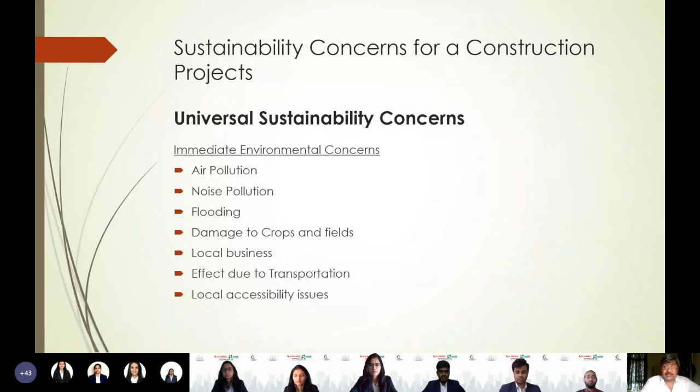Then we come to futuristic environmental concerns, the long-term concerns, geotechnical and geological effects. These are not very serious for road construction, but sometimes when studies are not conducted properly, they become serious, especially in bridges. Roads are not considered heavy civil engineering structures from a geotechnical engineering point of view, so they have very shallow foundations compared to what happens in dams, which are considered heavy structures. But when the road is constructed in hills, this factor becomes very important.

Now I will give you an example of sliding. What happens when a road is made in a hill is that from the alignment to a certain extent we study the slope, and we calculate the slip circle which passes through and fails the slope. So the slope should not fail, and that material should not fall on the road. So what we do is either cut the road in a milder slope so that slip circle gets mitigated, or we reinforce that particular slope so our reinforcement crosses that slip circle line, the imaginary line of the slip circle. So it becomes strengthened.

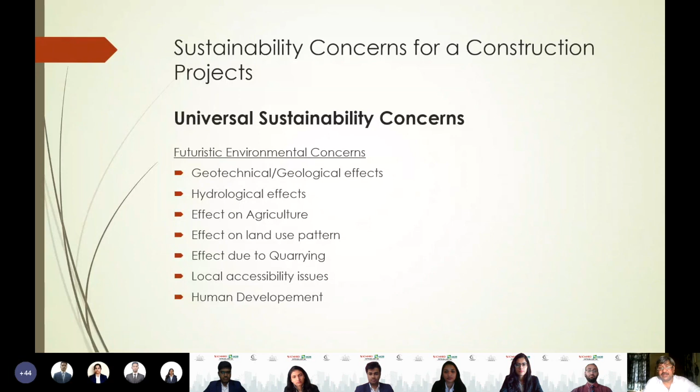Then we come to the modern mantras of sustainability, which come to mind, which you will be able to understand and digest in a proper manner. So, reduce.

Can I interact with the students? Is it possible to interact with the students? Yes sir, in the end we are going to have a question and answer session. In the end only, or even now, if I ask them to say something? So we can have a question and answer session right now.

Okay, so I want somebody to tell me that in road construction, this mantra, reduce, mantra number one, reduce - what can we reduce? Can we reduce the crust? Can we reduce the length of the road? Can we reduce the width of the road? What can we reduce? Can anybody come forward and help me in telling what we can reduce to make the road more sustainable?

We can reduce the use of more fossil fuels in construction of the road. We can use alternatives here. Fine, so we can optimally design the roads in order to reduce their length. Yes, we can optimize the structure and network of roads in order to reduce their length. But if you have to go from one place to another, you have to reach there. Now if you reduce the length, how will you reach there?

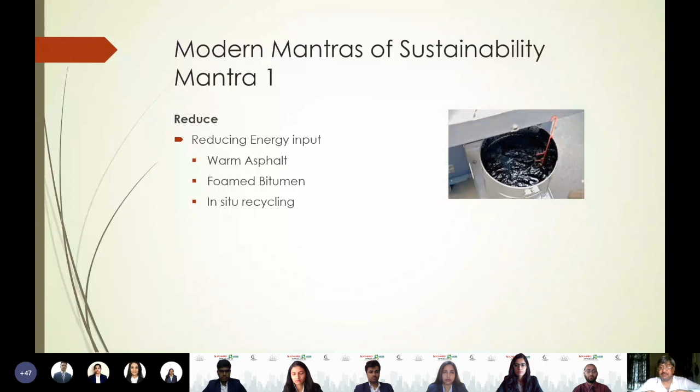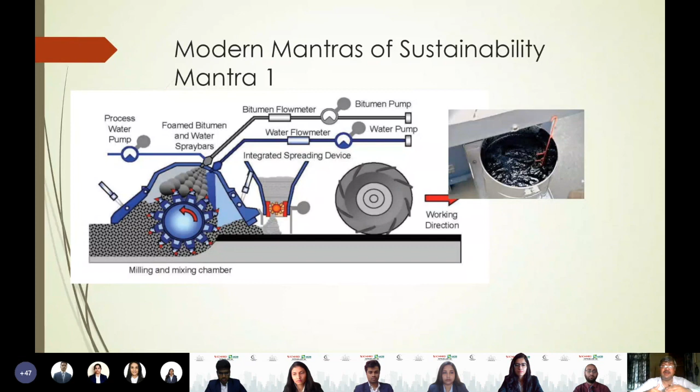So this is one thing, and then comes in-situ recycling. Before going to recycling, I've jumped directly to in-situ recycling because my first mantra was reduce, but let me touch on recycling. I will take it up in detail later on, but let me tell you a small bit about it now.

The material which has already been used for the road can be dismantled and reused to make road again. One way is that you dismantle this material, take it to the plant, then mix it and bring it back. Another way is when you recycle it then and there at site, in situ. This makes this sustainable practice even more sustainable.

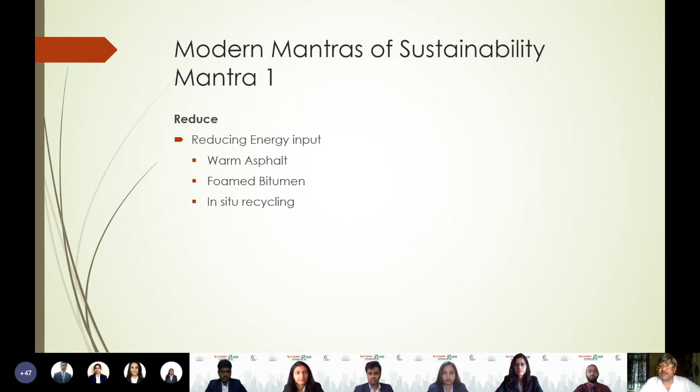Let me show you one video. Tell me if it is visible to you or not, so that I can change the way. Is the video visible? Yes, sir.

You see, there is a chain of machines, and this is milling. I will tell you more about this. This is hot milling going on, and then this material has been dismantled by this machine.

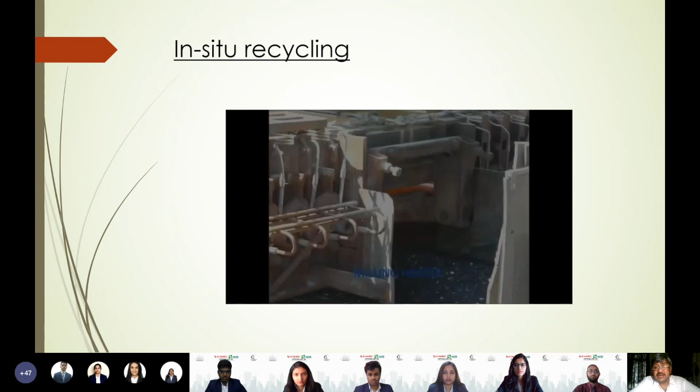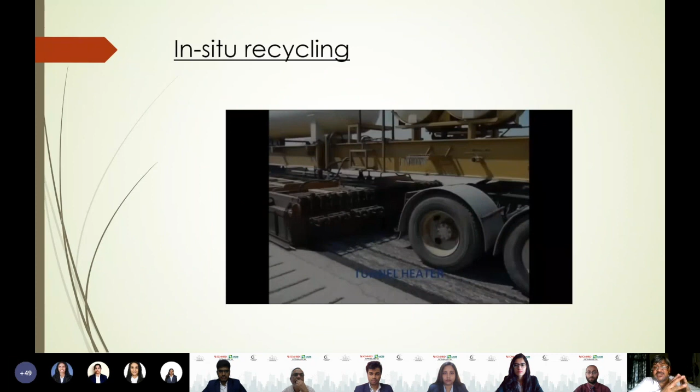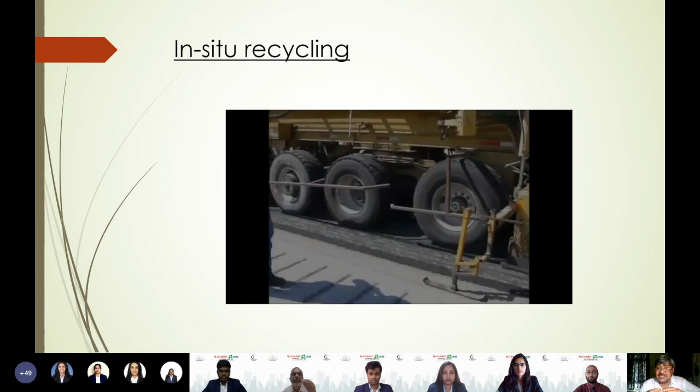You see that whatever asphalt is dismantled is heated, and at the end, that has rejuvenated. The bitumen which is already there in this dismantled system is rejuvenated with the help of chemicals, and then a little bit more bitumen and some fresh aggregates are mixed into it, and then it is laid back. You see now.

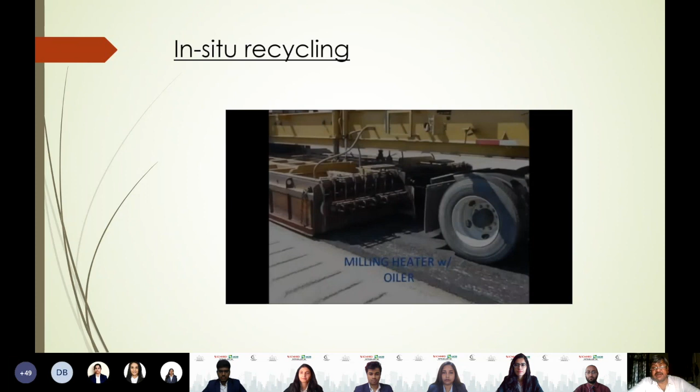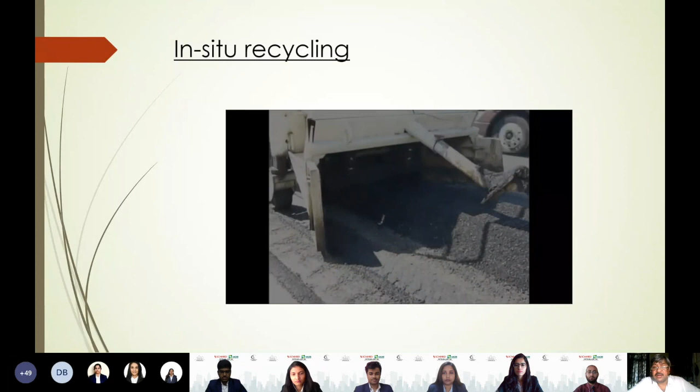So there is a chain. This is oiler, oiler is nothing but rejuvenator. After this, when the oiler is mixed, this will pick it up through this belt and feed it to the paver, and the normal paver paves it. This video is showing the rollers working behind the paver. So there is a chain of machines which recycles this asphalt then and there in situ.

So another thing we can reduce is input materials, whatever materials are going in, as you said, length. If we can reduce length, by reducing the number of curves. Although curves are not given just to provide them, they are an essential part of road design, road alignment design. Curves are given only when required. So if you are reducing the number of curves, you may be affecting some requirement, so that may not be possible every time.

But okay, another thing is if you shorten the curves, then also you can reduce the length. But shortening the curves makes the road more unsafe for turning, so that may in turn not turn out to be a sustainable practice. So what we can do instead is reduce the material, and one very effective technique which is being used now in India also is stabilization.

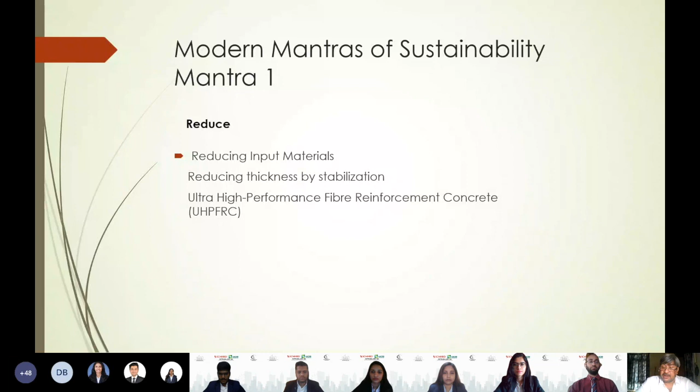Another aspect rightly pointed out is pollution. Now we reduce pollution by using locally available material, which means reducing transportation. If you can use some soil available nearby by transforming it through mechanical stabilization, that's what we did. Some quarry overburden material was available nearby, and we mixed 20% of that quarry material into the locally available soil, which was just available by the side.

My requirement was only 10% CBR. With 20% quarry material mixed in, I could get CBR of 10% even at 10% quarry material, but for practical reasons, to ensure proper mixing, we made it 20%. During actual quality control, based on the data, we reduced it to 15%. So it was actually 15% quarry material mixed with 85% locally available soil. This reduced not only cost but also a lot of quarrying and transportation requirement. This is one example to think of.

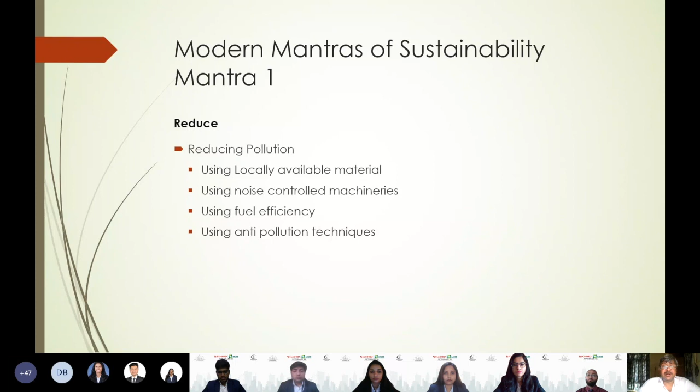Then comes recycle and reuse, mantra 2 and mantra 3. I have mixed them together, and you'll understand why - because here we are actually reusing material by recycling it. There are two ways of doing this: recycling the material already used in road construction, like recycled asphalt pavement, which we call RAP for short.

Actually RAP is a technique of recycling the asphalt pavement, but sometimes the dismantled material itself is termed RAP. I know in my flow I will also make this mistake of calling that material RAP - it's a common practice now, on our fingertips, to call that material RAP, but it is actually a technique. So first, let me explain.

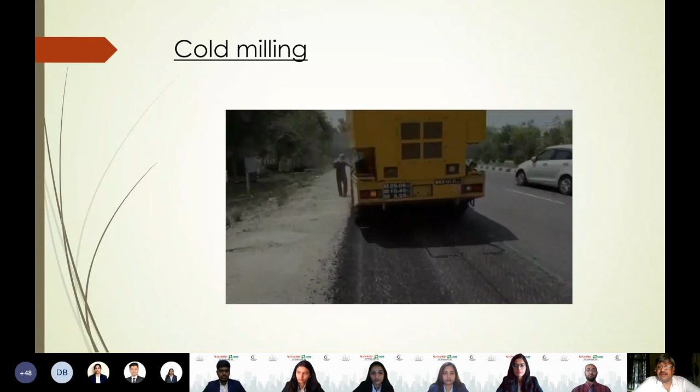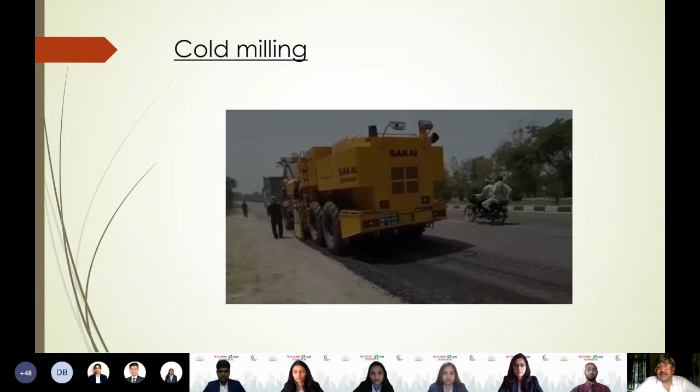Now another new technique has come into India, that is full depth reclamation. Presently, we are using it in village roads. By virtue of construction quality and specification, village roads are very weak in India, so normally if you go to villages, you'll find cracks and potholes. Now this technique has come where reclamation is done not limited to the asphalt layer, but full depth. All the aggregate layers and even soil come into it. Almost a 300 mm thick crust is cut and mixed together, then mixed with cement or lime and some chemical additive, and reclaimed to create a formation level. Over that, depending on the crust, it can be directly asphalt, or some base course and then asphalt.

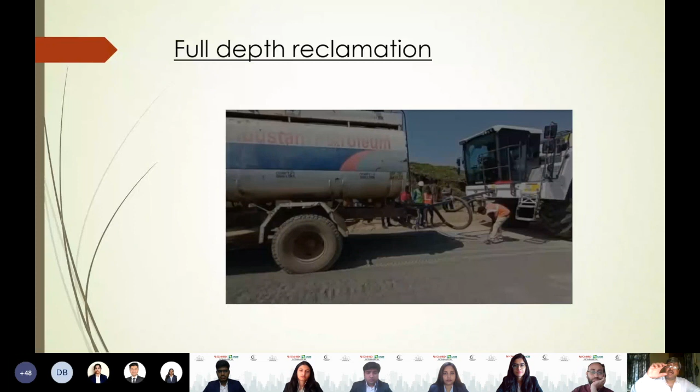So let us see how it is done. You can see the cement spread all over, as per the requirement.

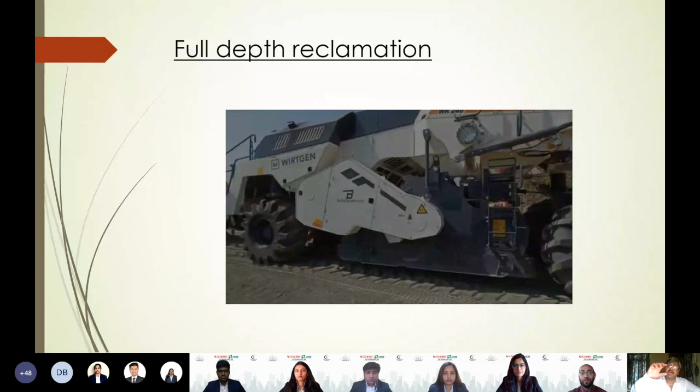Sir, your voice is breaking. We can't hear you, sir.

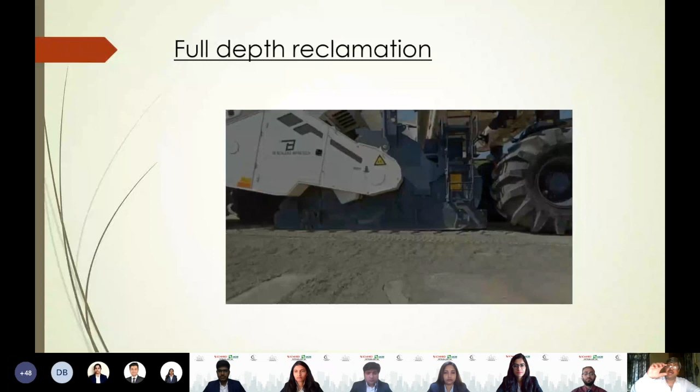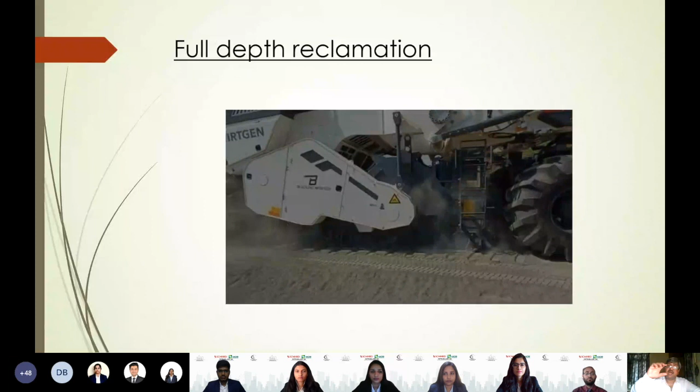You can listen to the sound, and see the bed out there. It looks like it's all mixed, with everything inside along with the cement. And then you can see this tanker.

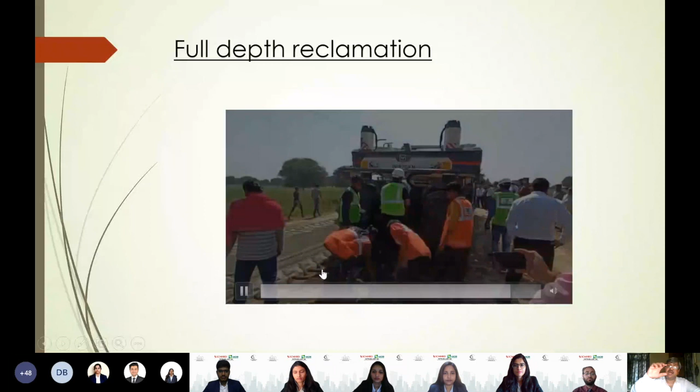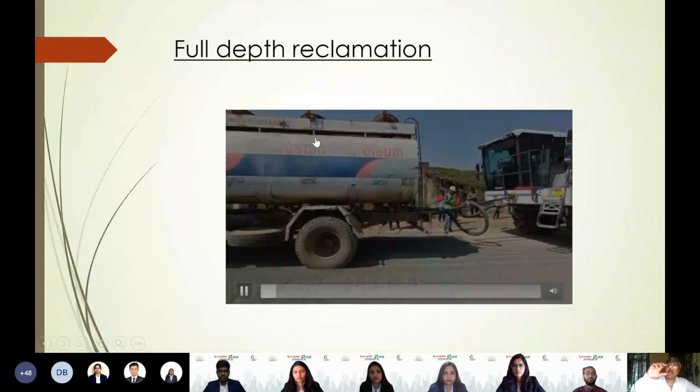So that's the process, and then we very quickly have to go to the other recycling topic. Now the other part, the last part, is recycling other wastes which are produced otherwise.

First of them is crumb rubber modified bitumen. Waste tires are crushed into small pieces and mixed with bitumen. After mixing with bitumen, that bitumen is brought to the plant and mixed with the aggregate. Although there are other types of modified bitumen, I'm giving the example of CRMB because it uses waste. This is one of the examples of recycle and reuse.

Then plastic. You must have heard of plastic roads these days. All the plastic waste which we throw can be used for making roads, for making asphalt. Here, the plastic is mixed with the aggregate before heating, then sent into the burner, where it gets mixed with the aggregate, forms a coat, and helps the bitumen stick better to the aggregate. But not all types of plastics can be used. Carry bags and thin plastics cannot be used because at the mixing temperature with aggregate, these plastics get burned. The plastic used here should not burn at 170 to 180 degrees centigrade; it should actually melt and mix in.

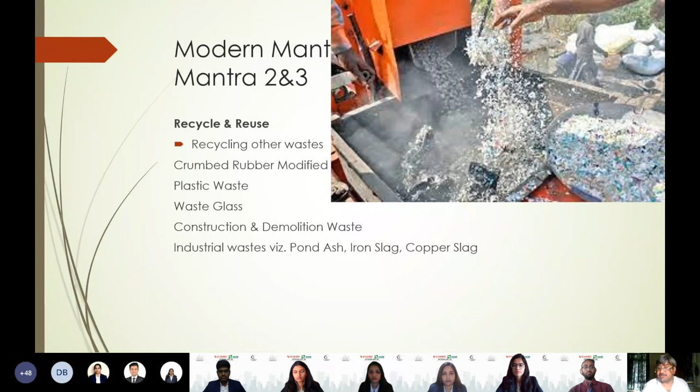Then comes a very new thing: waste glass. Waste glass is being used in concrete. Here the photographs are shown for concrete and also for asphalt, where waste glass is used as a replacement for sand.

Glasses are crushed to the size of 4 mm and below, and then it is replaced with sand. So this is another thing.

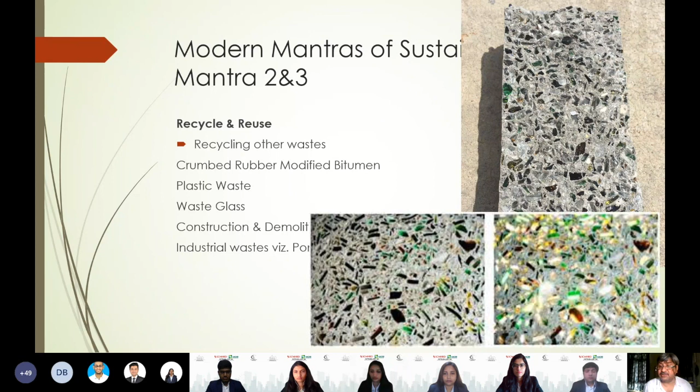Then C&D wastes, construction and demolition waste. Whatever material is coming out is again crushed, converted into aggregate sizes and used basically in concrete. This has not been used in asphalt until now. It is used in concrete works, and that too in low strength concretes, not so important concretes up till now.

Then other wastes like industrial waste, pond ash, iron slag, copper slag. Since time is running out, I'm not going into detail of this industrial waste. We can use pond ash, slags of different types in various stages, various parts of the crust. Pond ash is used in embankment and subgrade. Iron slag and copper slags are used in general fill and subgrade, as well as in sub bases and sometimes in bases also. So that brings me to the end of this presentation.

Have a nice... Do you have a question? Yes, sir.

First of all, good morning and thanks a lot for such a great session. Sir, we generally see and read about the use of plastic to make roads so as to reduce plastic pollution, as plastic is non-biodegradable and stays in the environment. So is the use of plastic in road construction really sustainable, or is it still staying in the environment even after being used in the roads? Are they just theories or are they really sustainable to the world?